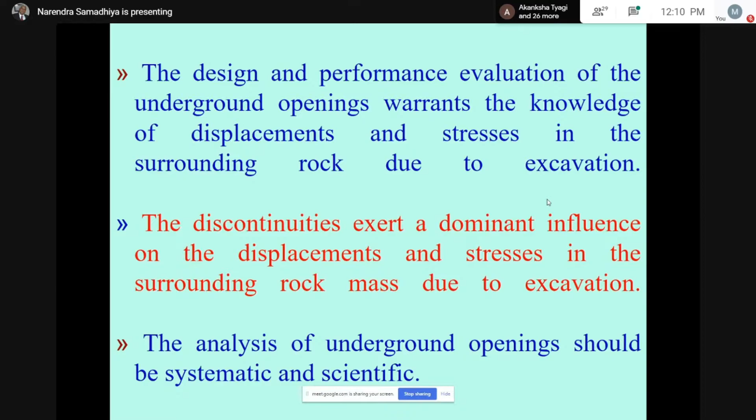In situ rock will always have discontinuities in the form of various geological structures. These play a dominant role and influence the displacements and stresses in the surrounding rock after excavation. So the analysis of underground openings should be systematic and scientific. If it is not, you will get this type of situation.

It may collapse also. This is the heading collapse, 27th of October 2004, in the Teesta Stage V Hydroelectric Project.

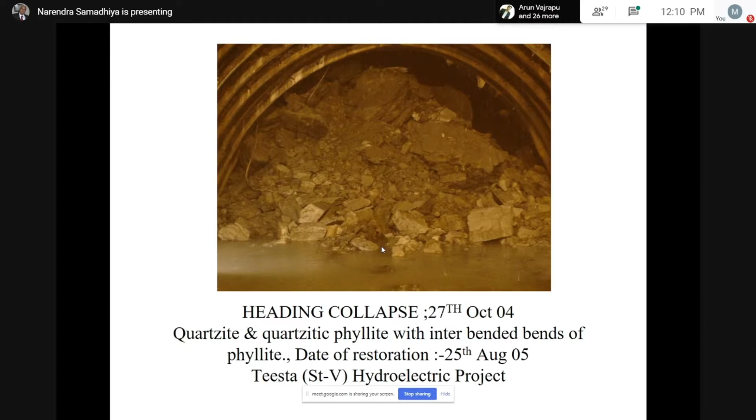As I said, the rock mass essentially consists of two constituents: one is the intact rock, and another is the discontinuities. The presence of these natural discontinuities, which may be part of a fault, fold, shear zone, joint, or bedding plane, can exert significant influence on the response of rock masses in both surface and underground excavations.

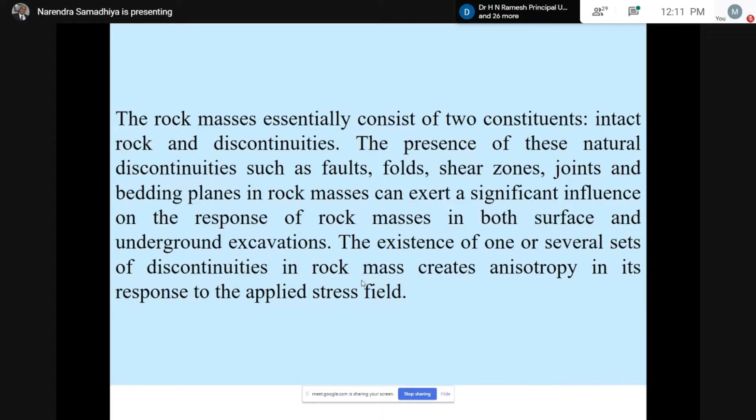All these joints always occur in sets, creating anisotropy in the response to the applied stress field. In order to analyze this Sardar Sarovar powerhouse cavern, I used the shear zone as well as rock mass, all the joints, their orientation, actual attitude meaning dip and dip direction, spacing, and number of joints, etc.

For that, I had to develop a 3D joint interface element. Since I did the three-dimensional analysis, I went for the 16-noded joint interface element, where the top surface is in contact with one material and the bottom surface is in contact with a different material.

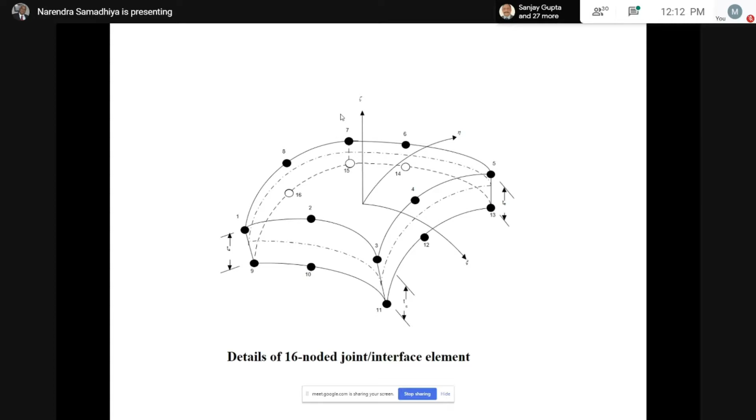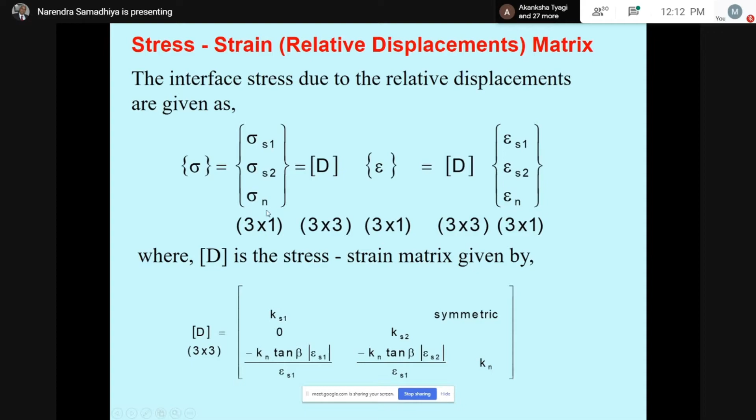As far as the derivation is concerned, this is the middle surface of the joint element interface. I will not go into the details here because they are available in my ASCE paper, International Journal of Geomechanics. I determined the relative displacement between the top surface and the bottom surface, and from that derived the D matrix for this joint element. All details are available in the 2008 paper, '3D Joint Interface Element for Rough Undulating Major Discontinuities in Rock Masses,' International Journal of Geomechanics, ASCE.

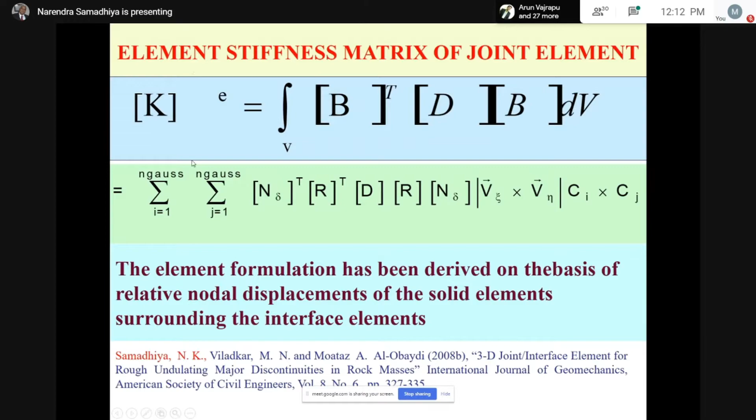So this is how I have derived the element stiffness matrix for the joint element. And since I have regular jointing in the rock mass, I had to derive the constitutive relations for the rock mass. What I have done is taken the overall response of the rock mass and tried to replace it by an anisotropic continuum, so that I can get the response of the entire rock mass.

Here, epsilon z double dash represents the strains in a direction perpendicular to the joint, and since there are a number of joints, I have summed them up. I have also tried to take into account the dilatancy, the change in volume, or the overriding of the joints during sliding.

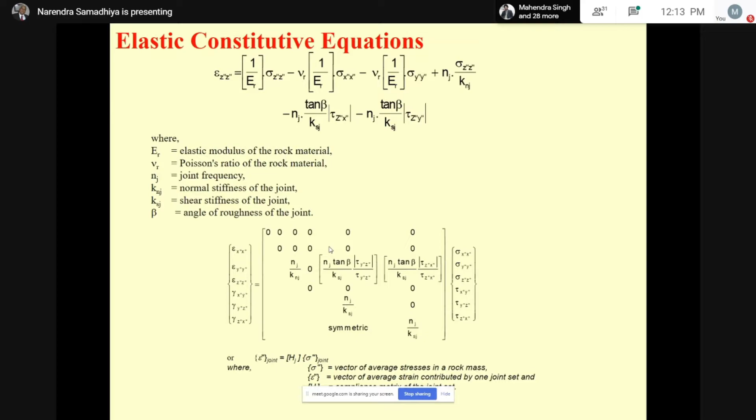So I have tried to find out the stress-strain matrix, also known as the compliance matrix. Since there are joints oriented in different directions, different directions are involved, so I had to go for the transformation matrix from one axis system to another, and another axis system to the one perpendicular to the joint. So this is the compliance matrix for the rock material, and this is the compliance matrix for the joint.

This particular part is also published in the International Journal of Geomechanics, ASCE, so I will not go into the details.

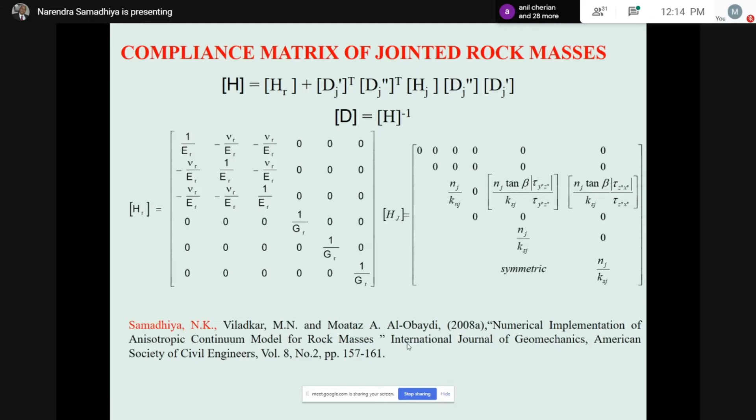Now, including all those features, I have developed a program. Actually, I wanted to name it ASRAM, but I could not do it, so this is ASARM, that is, the analysis of stresses in anisotropic rock masses.

There are several capabilities of this particular program. This is our program at IIT Roorkee, and we have analyzed several cavities using it. This program is a general purpose finite element program, and the program structure is modular, with applications in rock and soil mechanics.

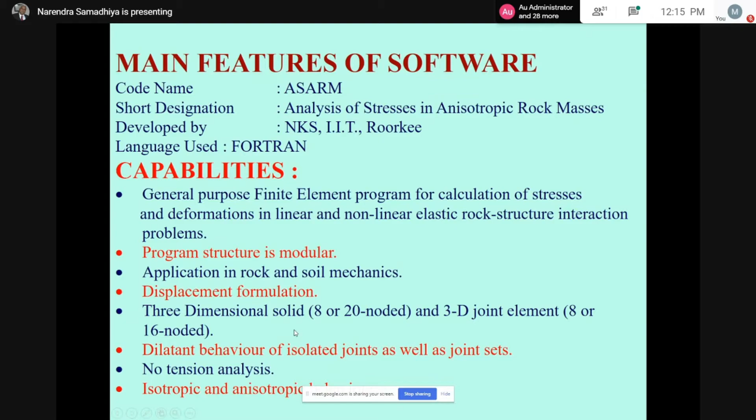This is a displacement formulation, with three-dimensional solid elements and 3D joint elements that can be included. It can take into account dilatant behavior. We have done no tension analysis. It can be used for isotropic and anisotropic materials, with explicit representation of major discontinuities and implicit incorporation of regular jointing. Pressure dependent modulus has been used.

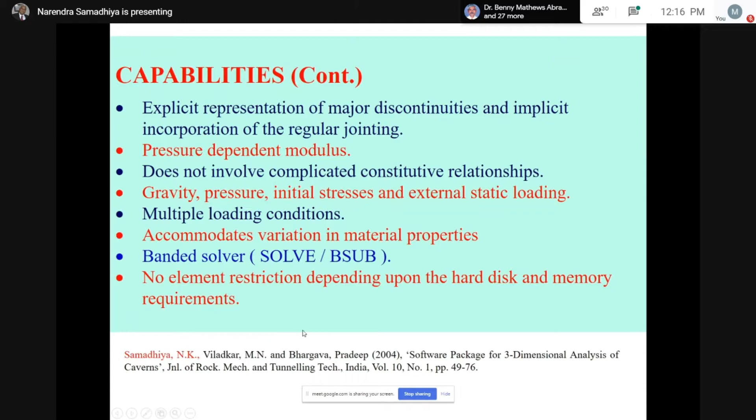Now I have extended it for water-charged rock mass also, and we can go for multiple loading conditions. The entire description is given in one of my papers in the Journal of Rock Mechanics and Tunneling Technology.

Using this program, I have analyzed the Sardar Sarovar powerhouse cavern and tried to find out the stress distribution and also the displacement. Those displacements I have used as the boundary condition for the analysis of the shotcrete lining. All the details are given in the International Journal of Rock Mechanics and Mining Sciences.

So coming to the Sardar Sarovar Powerhouse project, with this background, it is a World Bank aided multi-purpose river valley project, which all of you know is constructed on river Narmada and is situated at Kevadia village in Gujarat state.

This project includes a 138.68 meter high and 1210 meter long concrete gravity dam, and the underground powerhouse cavern, which is aligned north 10 degree east parallel to the main dam, is a large cavern of 23 meter width, 210 meter length, and 58 meter height.

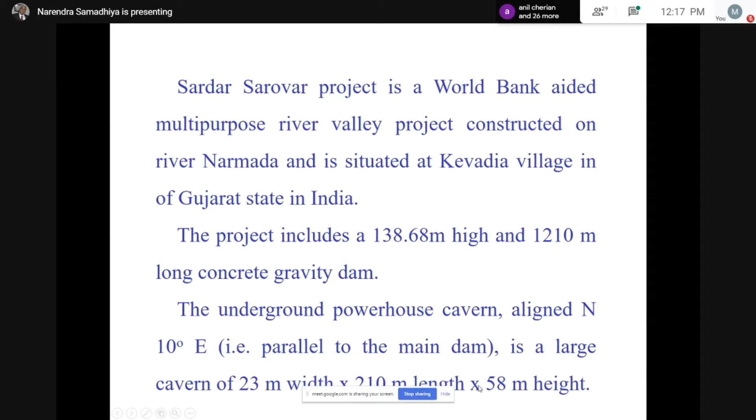The overburden for this cavern is of the order of 30 to 65 meters, and there are various types of rock, like agglomerate and dolerite dikes. Those range in thickness from 40 to 55 meters.

One such dike, which cuts the alignment from chainage 1448 to 1492.5 meters at the cavern, is aligned in north 70 degree east, south 70 degree west direction, and dips at 60 to 65 degrees towards the river side. Both contacts of this dike with the adjoining basalt flows are sheared.

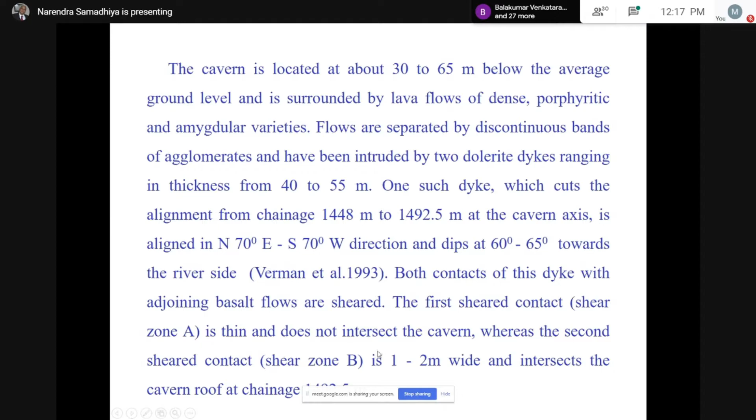The first shear contact is thin and does not intersect the cavern, whereas the second shear contact, which I have designated as shear zone B, is 1 to 2 meters wide and intersects the cavern at chainage 1492. This is the geological longitudinal section.

Here you can see the different types of rocks present: agglomerate, basalt, dolerite dike, and dolerite sill. This dolerite intrusion is something like this, and there is another vertical dike on this side, but it doesn't intersect. So this is the boundary of the cavern.

So this is the boundary of the cavern. Here you can see there are two shear zones: shear zone A and shear zone B. Shear zone A doesn't intersect the cavern, whereas shear zone B, which is about 1 to 2 meters in thickness, intersects the cavern and is aligned obliquely inclined to the horizontal plane. These are the materials which are there.

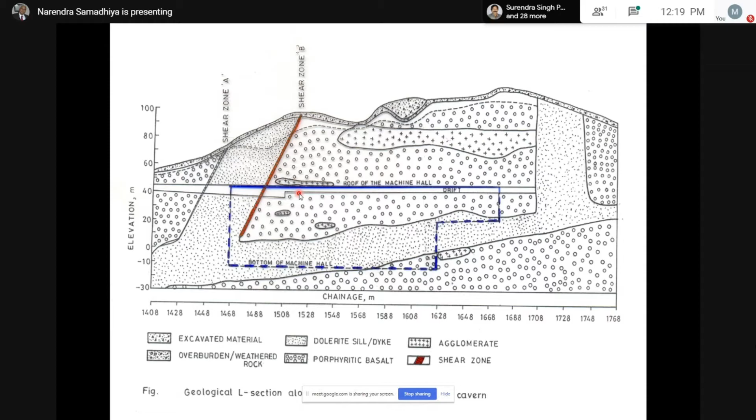Now I have tried to simulate the actual geometry. This is my longitudinal section of the finite element mesh, in which you can see the cavern, representing the shear zone, and representing the dolerite dike on this side.

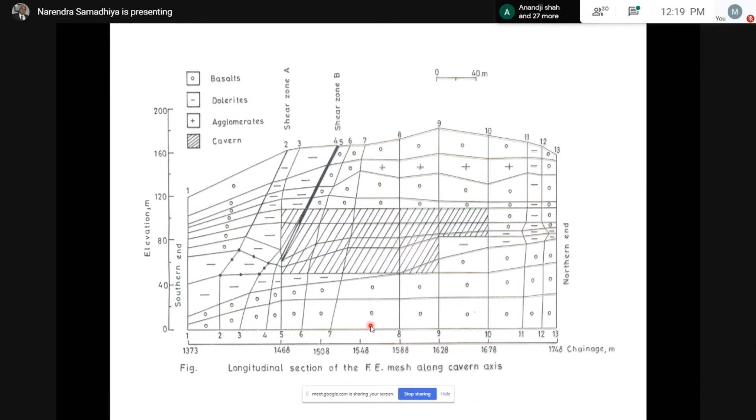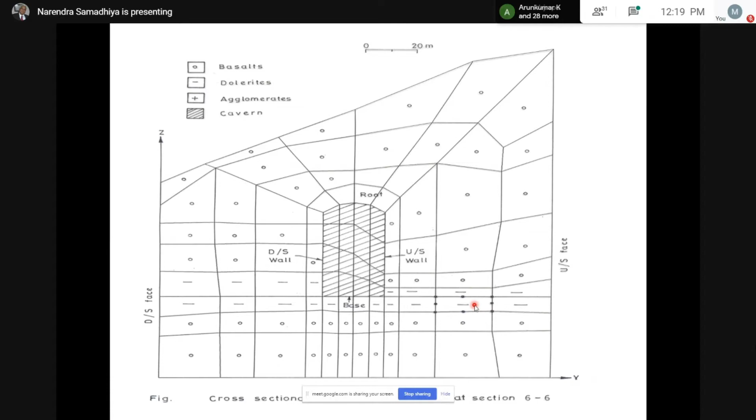Now this is the cross-sectional elevation. You can see, although the elements I have used are not the finer elements, since I had to consider the entire mass, I have used these elements. Now this is the three-dimensional view of the entire underground cavern.

Now, normally we say, what is the use of engineering graphics? Why do we teach engineering graphics, and why do we teach stereographic projection? I can say here that without the knowledge of engineering graphics and stereographic projection, I would not have been able to create this particular three-dimensional geometry.

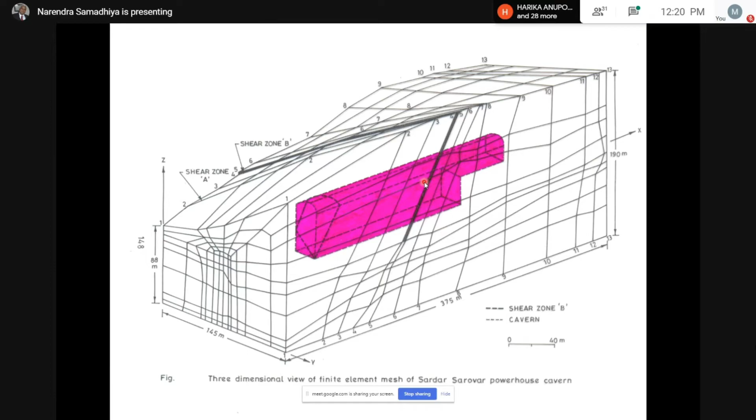Now, after the analysis, I have taken into account the anisotropic rock mass with shear zone. Although I have analyzed for the isotropic case without shear zone, and isotropic with shear zone, finally the anisotropic rock mass with shear zone is the actual condition.

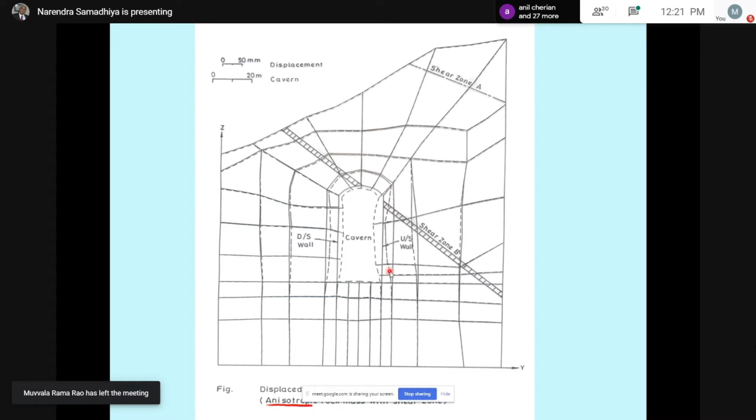So what I have done is determine the displacement all along the boundary of this particular cavern using this procedure, and those boundary displacements I have considered as the boundary condition for the shotcrete lining.

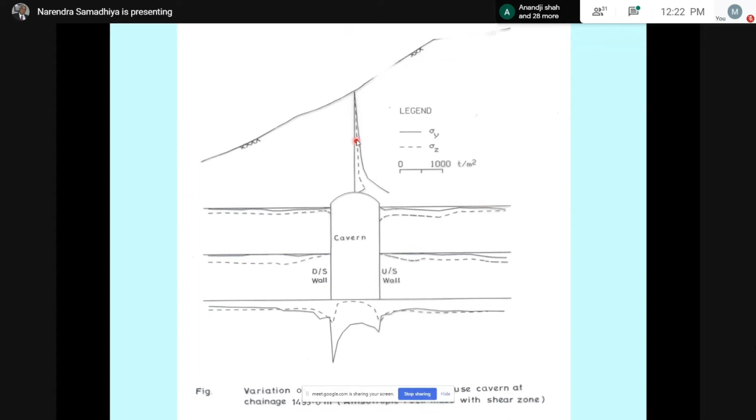So these are the stresses, this is the stress pattern. I have tried to represent sigma y and sigma z in the vertical direction and sigma y in the horizontal direction. So this is the variation - you can see there is a lot of concentration of stresses in a direction tangential to the excavated boundary.

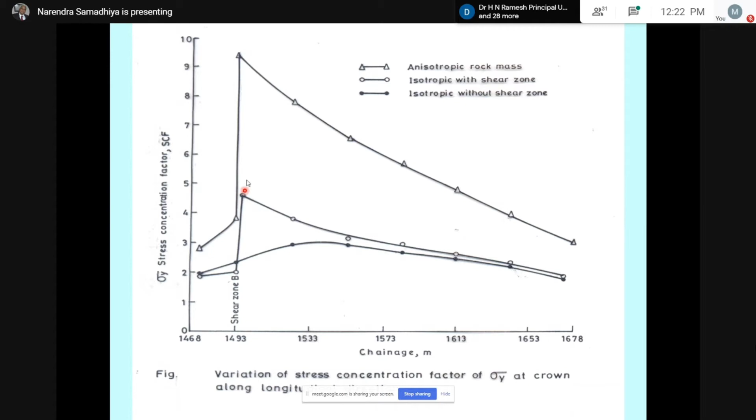You can see that the stress concentration factor has increased - considering only the isotropic case it's around 2 plus, for the isotropic case with shear zone considered it's around 4, and then it has gone up to around 9.5. So the fact is that there will be a lot of stress concentration near the shear zone boundary.

Then I have analyzed the shotcrete and tried to find out the support pressure. Now the shotcrete lining has been modeled by the method of substructuring. The shotcrete has been modeled using a single layer of 20-noded isoparametric brick elements. The portion of shotcrete modeled includes the side wall, the crown, and the southern face.

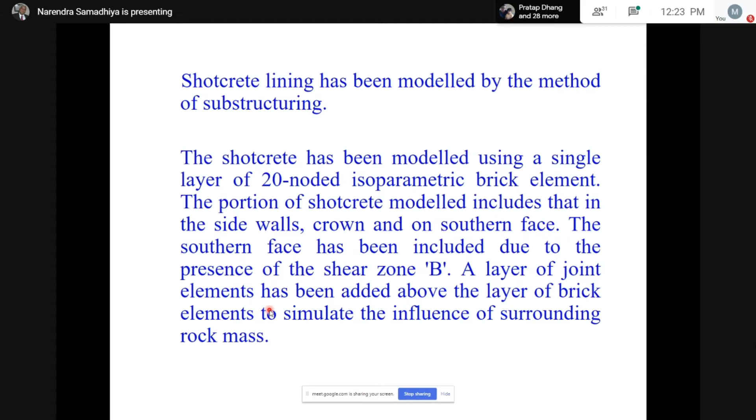The southern face has been included due to the presence of shear zone B because it is intersecting there. A layer of joint elements has been added above the layer of brick elements to simulate the influence of the surrounding rock mass. The displacements derived from the analysis of the cavern have been applied to the outer surface of the joint elements other than in contact with the shotcrete, to obtain the displacement, support pressure, and stress in the shotcrete.

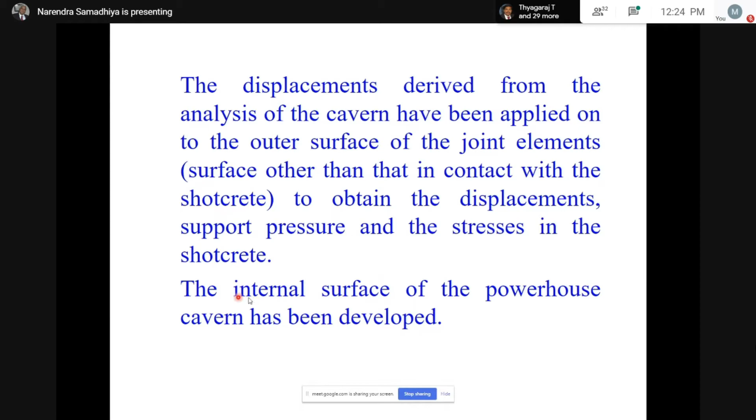So the boundary conditions have been imposed by assigning the displacements at the corresponding nodes lying on the outer surface of the joint element. The elements in the shotcrete layer lying at the sidewall-floor junction have also been subjected to prescribed displacements equal to the displacements obtained from the analysis of the cavern at the same point.

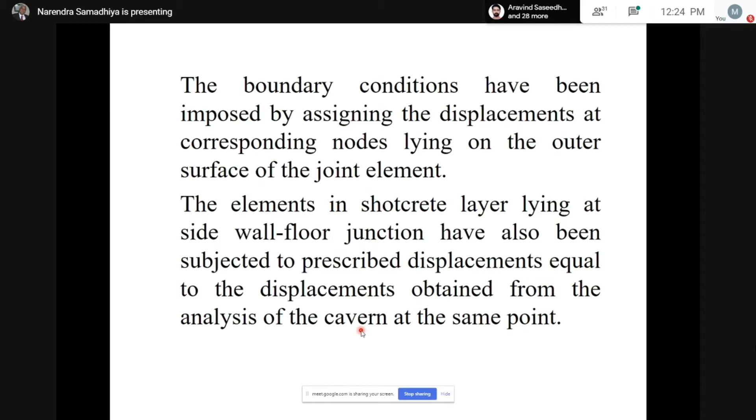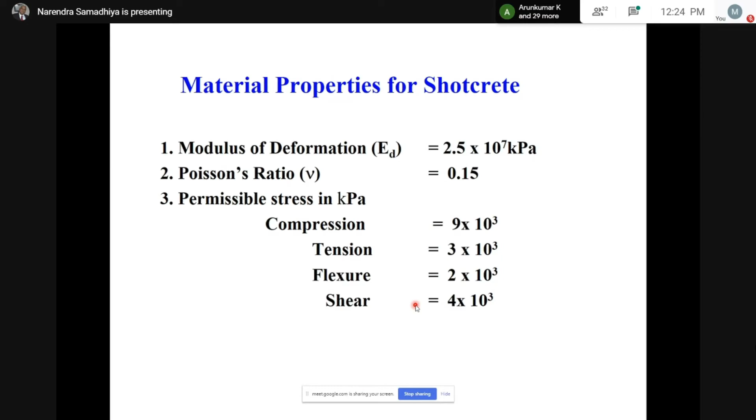Now, each joint element has a spring in the direction normal to the surface of the shotcrete, so the stiffness matrix has been determined - that is the pressure divided by the displacement. That pressure is due to the normal in situ stress divided by the displacement due to the release of the in situ stress.

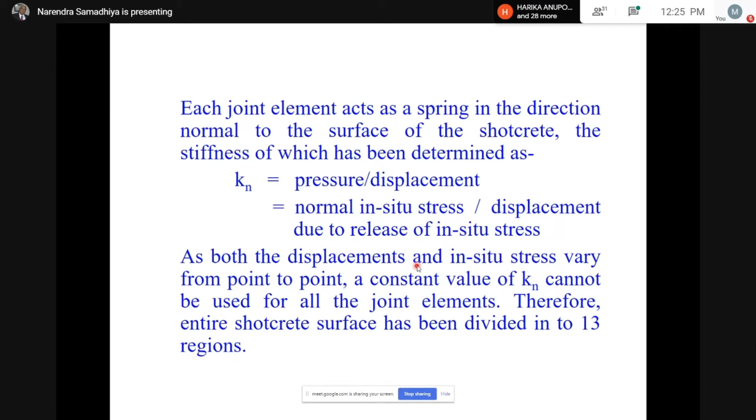Since the overburden, meaning the top surface, is varying all along the boundary of the cavern, I have tried to find out the normal in situ stresses at different locations, which varies. So I had to divide this into 13 regions. Here the different values of the normal stiffnesses and shear stiffnesses are given.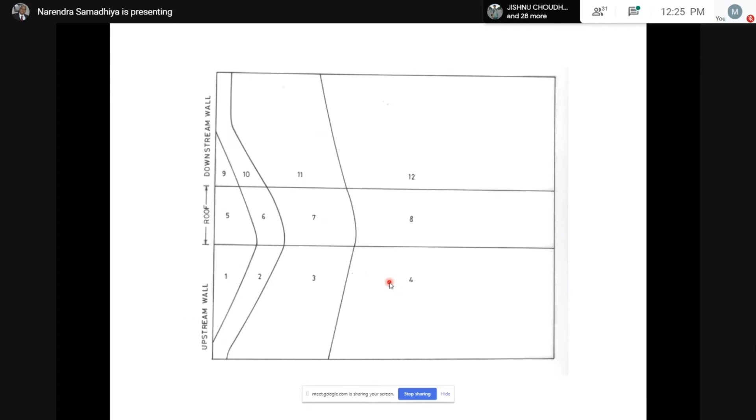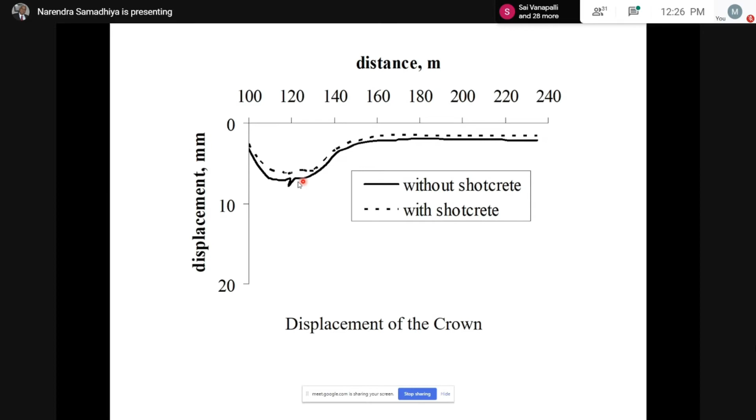But if we apply the shotcrete lining, then with shotcrete you don't see this particular kink.

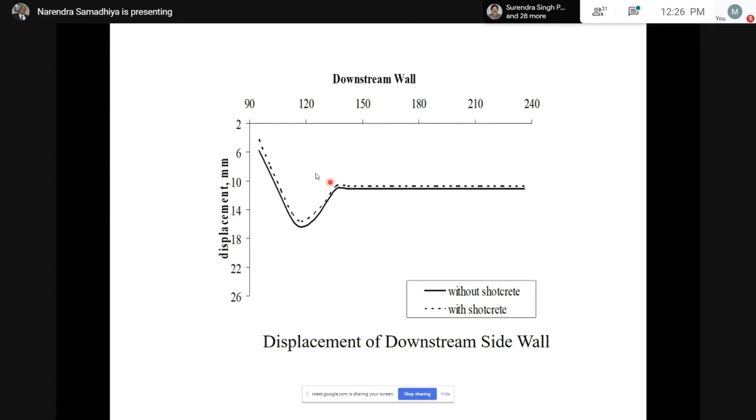Now these are the displacements of the downstream wall. This is near the shear zone or just at the shear zone contact. Now these are the displacements of the upstream wall, and again these are the displacements.

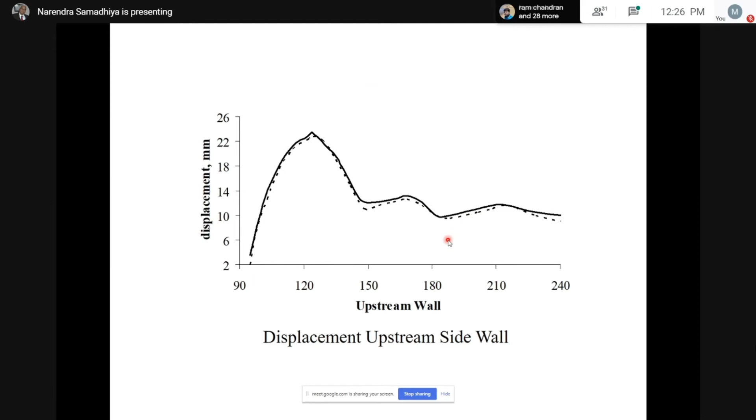So near the shear zone you can see the effect of the shotcrete. Now the effect of shotcrete is not predominant. It means this shotcrete is simply acting as a layer. The application of shotcrete layer has reduced the displacement only marginally. So the effect is more pronounced at the crown, whereas in the side wall the reduction is small.

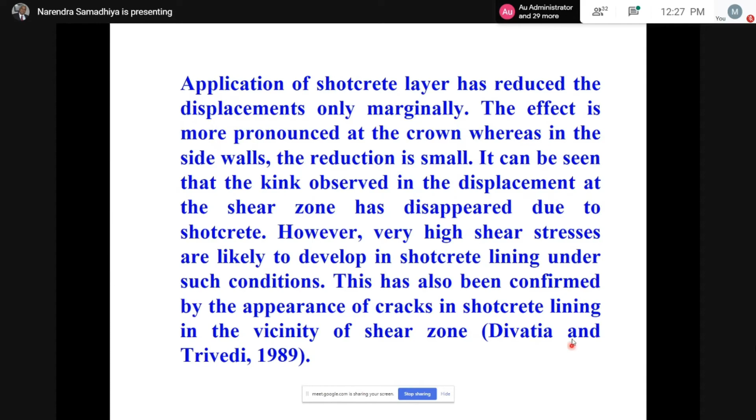It can be seen that the kink observed in the displacement at the shear zone has disappeared due to the shotcrete lining. However, very high shear stresses are likely to develop in the shotcrete lining under such conditions, and this has also been confirmed by the appearance of cracks in the shotcrete lining in the vicinity of the shear zone, a study done by Divatia and Trivedi.

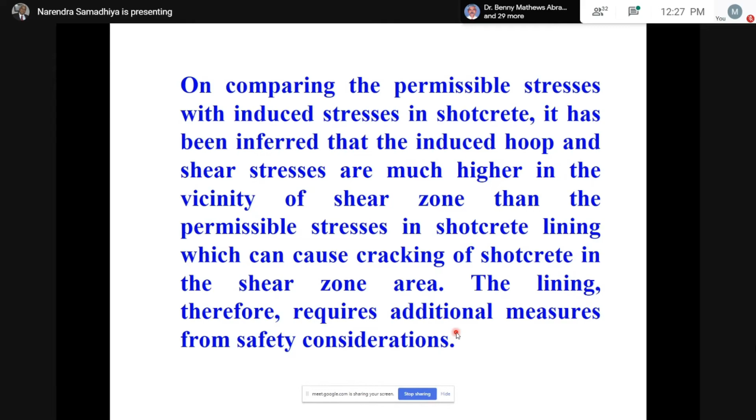On comparing the permissible stresses with the induced stresses in the shotcrete, it has been inferred that the induced hoop stress and shear stresses are much higher in the vicinity of the shear zone than the permissible stress in the shotcrete lining, which can cause cracking of the shotcrete in the shear zone. The lining therefore requires additional measures from the safety considerations.

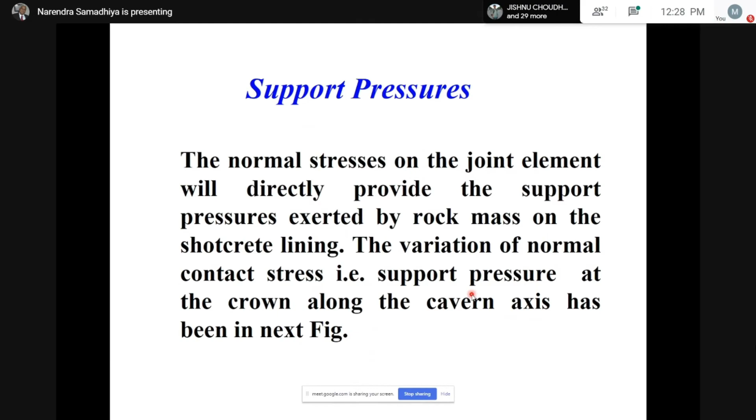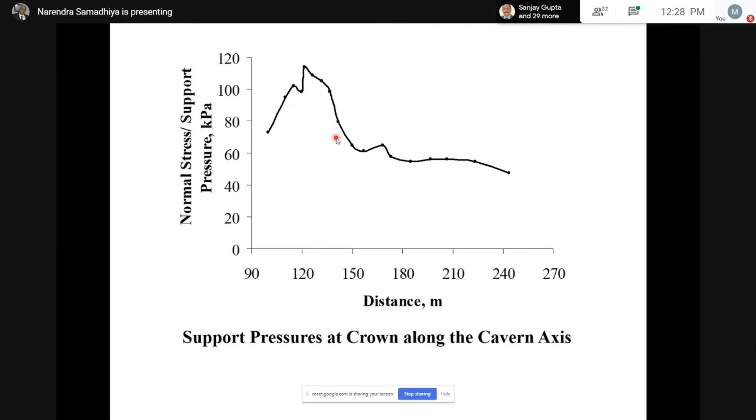Naturally, the support pressure in the area very near to the shear zone will be high, and then lower away from the shear zone. So the support pressures are high in the vicinity of the shear zone, of the order of 75 to 115 kilopascal, and 50 to 65 kilopascal away from the shear zone.

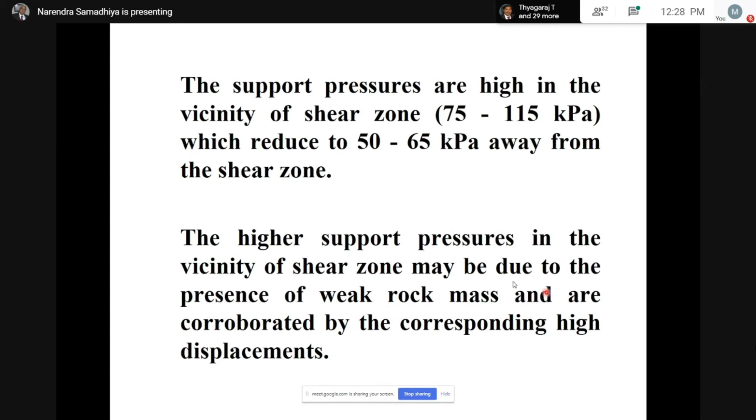The higher support pressure in the vicinity of the shear zone may be due to the presence of weak rock mass, and are corroborated by the corresponding high displacements. The roof support pressures thus obtained have been compared with Barton et al. 1974, Barton 1989 approaches, and Bhasin et al. in 1995. Grimstad and Barton have advocated the use of mean value of Q around the weak shear zone.

On similar lines, I have suggested that the mean value of the joint roughness coefficient, Jrm, should also be used in estimating the support pressure.

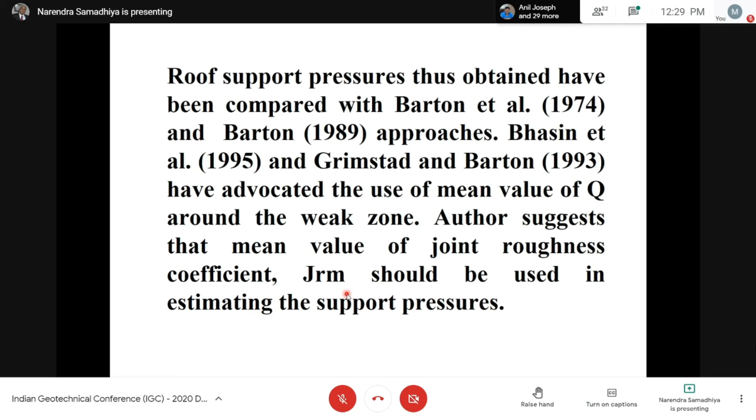So what I have tried to do is find out - this is the data based on the study given by Ramaswamy et al. They have determined this Q parameter: RQD, JN, JR, JA, JW. So near the shear zone, I have said that we should go for determining the effect of the shear zone, etc.

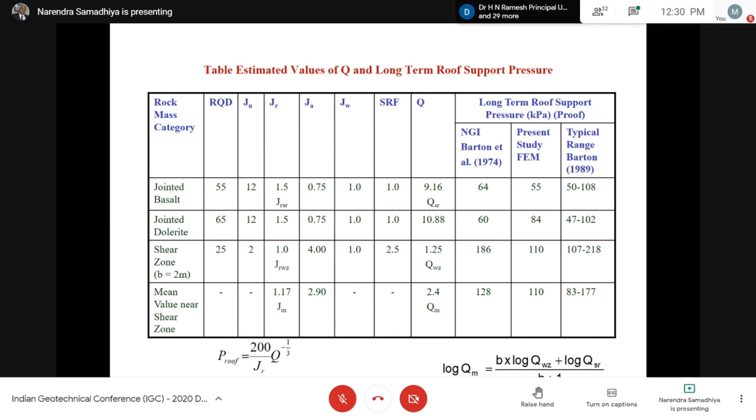So here this is jointed basalt, this is jointed dolerite, then the shear zone, then the mean value of the shear zone. So the roof support pressure and the wall support pressure as per the Barton criteria is determined from these two equations. Grimstad has suggested that we should go for this Q mean, and they have given this relationship.

So I have also suggested that we should account for the effect of the shear zone material on the value of JR.

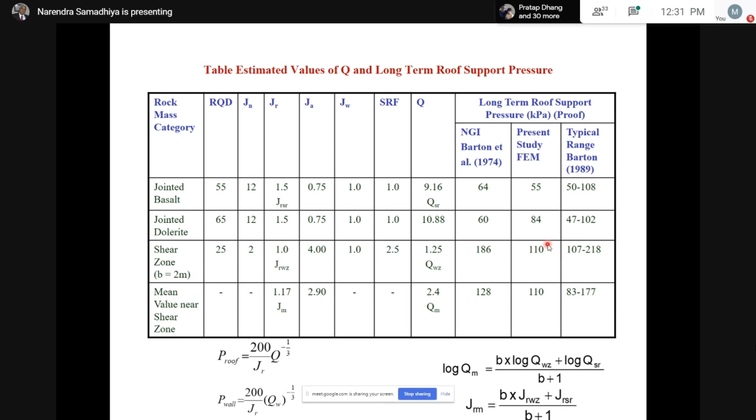So then I have determined the roof support pressure from this present study FEM, then the NGI Barton's 1974 system, and then the typical range which are suggested by Barton in the 1989 paper. You can see that the support pressures are in agreement with what has been suggested by Barton. So I can say that this is an alternate approach by which we can also determine the support pressure.

So finally, the conclusions are that the shotcrete behaves essentially like a membrane. The stresses in the shotcrete are higher than the permissible stresses, especially near the shear zone. The influence of shotcrete is negligible as far as the displacement behavior of the cavern is concerned, because of its low stiffness.

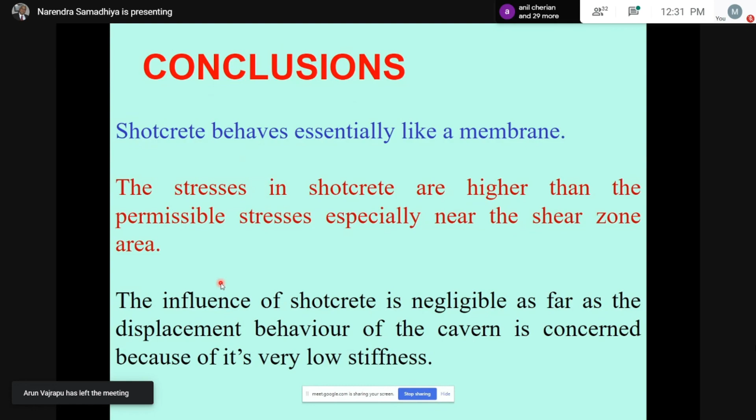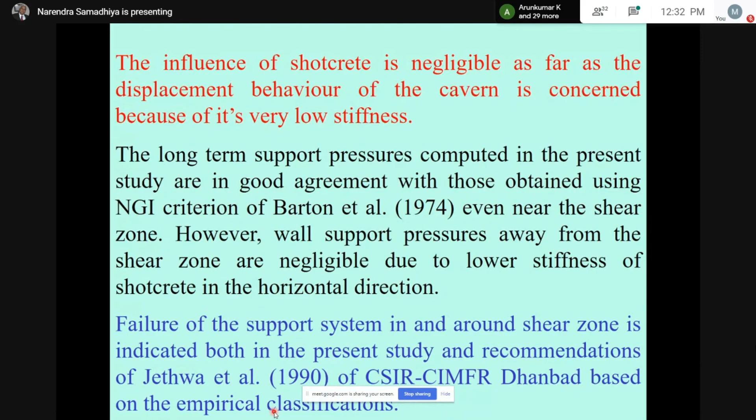The influence of shotcrete is negligible as far as the displacement behavior of the cavern is concerned because of its very low stiffness. The long-term support pressures computed in the present study are in good agreement with those obtained using the NGI criterion of Barton et al., even near the shear zone. However, wall support pressures away from the shear zone are negligible due to the lower stiffness of the shotcrete in the horizontal direction. Failure of the support system in and around the shear zone is indicated both in the present study and the recommendations of Jethwa et al. of CSIR-CIMFR Dhanbad, based on the empirical classifications.